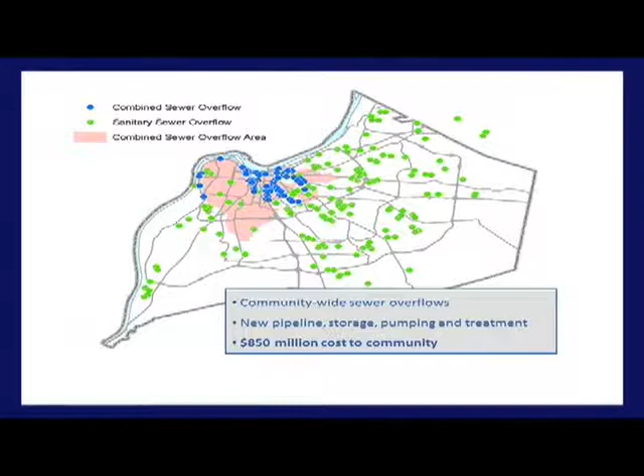You see two different colored dots on that map. The blue dots toward the northern part of the city are combined sewer overflows - they go straight to either the Ohio River or Beargrass Creek, and they're the older, original sewers built in this community that carry both stormwater and wastewater together. The other dots outside of that are separate sanitary sewers with separate stormwater systems - those are sanitary sewer overflows that behave the same way, just in a different part of the system.

When we look at the work done in this community to solve this problem of overflows and the public health impacts, it goes back to the 80s, when MSD, working with the state, removed hundreds of failing treatment plants that had been built by subdivisions as the community sprawled away from the city. Once those were removed and thousands of septic tanks eliminated, we still had these overflows remaining.

In working with EPA and the state of Kentucky, it was discussed that we needed to move this work forward, and we entered an agreement with them to clean up this remaining part of the pollution.

That plan was submitted in 2008 per that agreement. It was approved in 2009, setting out stipulations for when this work would be completed. The work on those combined sewers, the older sewers mainly within the Watterson Expressway, must be completed by the end of 2020, and the work on the separate sanitary sewer system must be completed by the end of 2024. The particular project we're discussing falls within the 2020 group.

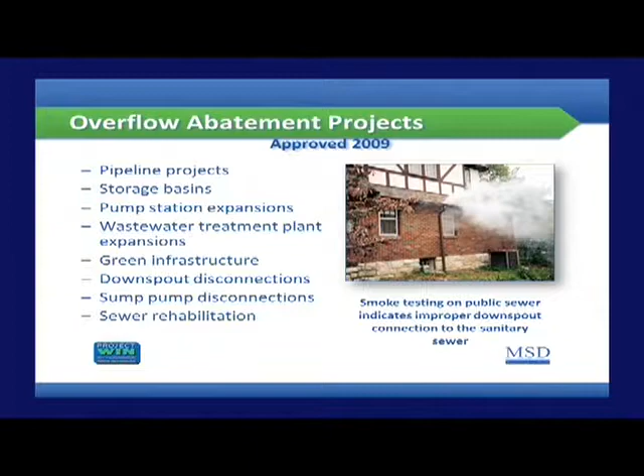You can see the specific groupings of projects that have been going on since we entered into that agreement. So we're actually in the section where we're designing those CSO basins, those overflow basins for those combined sewers that have to be finished and operational by the end of 2020.

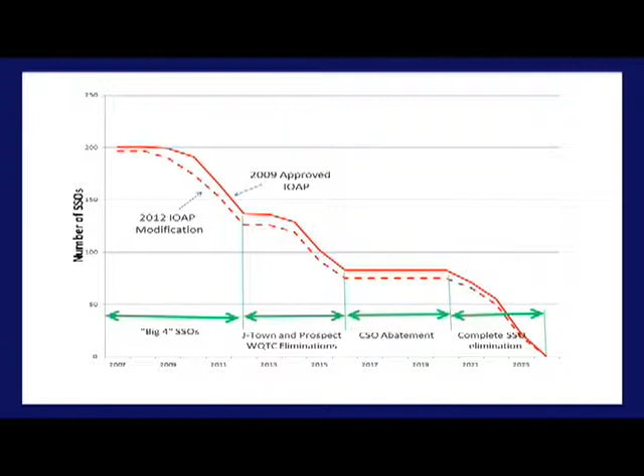So what we're going to be doing this evening is actually presenting some early design concepts and getting your input on how we can enhance those, what options might be more amenable to those that use this area that we're going to be talking about.

It's a little bit different than we've done in the past, and so the little clickers that you have will be working with you to provide some input through those. At that point, I'm going to hand this over to Dr. Ted Grossart with the University of Kentucky, and he's going to be asking you some questions.

See, you could have left the UK part out, and I probably would have got along better.

Hi, my name's Ted Grossart. I am at the University of Kentucky, but in my defense, I'm also teaching a class at the University of Louisville, so I'm partly, partly reprieved.

The MSD has asked us to come in and help them improve and give them a better way to get a more nuanced set of information from the people in the districts that are going to be involved with these projects. So the kind of work we're going to do involves sort of like having a giant focus group.

We're going to ask questions of you. We'll record some of your answers, and then you'll use the keypads to give us some responses on some of the answers that you've given us. We'll start with some relatively simple things.

I'm going to ask you, let's go to the next slide. So, first question is, how young are you? And of course, you have ample opportunity to fib here, but then I wouldn't know who is fibbing, so press the number that corresponds to what you would like your age to be, or you believe your age to be.

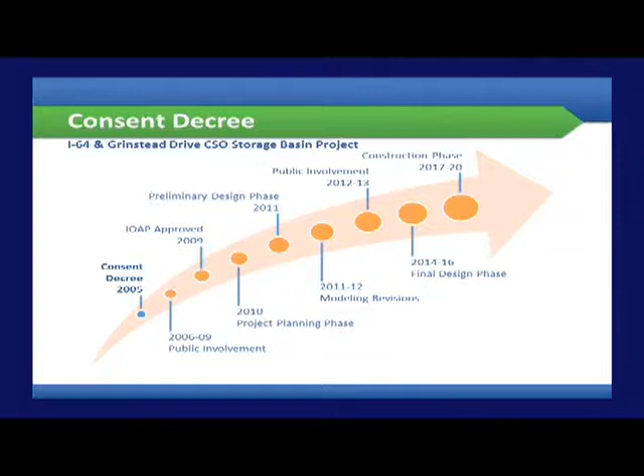Beginning back in 2005 with our original consent decree, we started a public involvement process in 2006 and carried that through 2009, with a series of about 20 overall consent decree related meetings throughout the community, in addition to about 200 or more meetings with individual neighborhood associations and smaller groups, to educate them about what was coming in terms of the work we had to do in the future, the magnitude of that work, and what that was going to do to rates in the future.

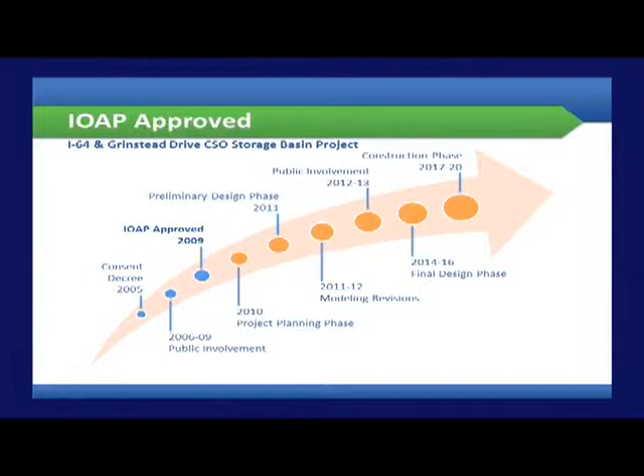That public involvement went through and continues today. The IOAP was actually approved in 2009 by EPA, so that was our blessing to proceed with work on this series of projects, although we had actually begun on some of them prior to that date.

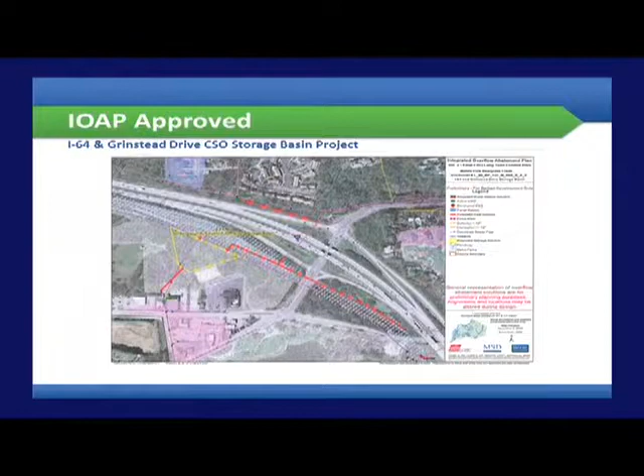This is a map that represents what the original plan for the IOAP basin looked like for the I-64 and Grinstead project at the time. It was about a 2.75 million gallon basin originally sited in an open area just northwest of Jim Porter's property, between Jim Porter's and the Middle Fork of Beargrass Creek. So that's where we started in terms of a conceptual plan for this particular project.

If you've been to any of these meetings before, you'll understand that these CSO basins are sited among numerous CSOs. They're sited strategically so we can convey and store flows from multiple CSOs instead of building a basin for each one. So we're collecting flows from 4 CSOs at this location.

So we began the design phase at that time, and we had a roadmap of what we thought that was going to look like. Early in the process, because that site was originally selected at a pretty high level, we did a more in-depth review of some of the adjacent properties near that site, still concentric to the 4 CSOs we're trying to control.

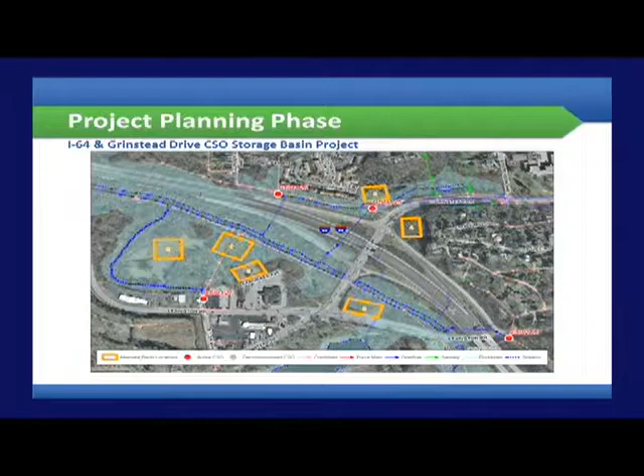So we moved into what we thought was going to be a preliminary design phase, and about the same time we went through a modeling revision in our consent decree. One of the good things about our consent decree is that it gives us the flexibility to modify our plan as we proceed, making modifications as we find ways to make it more efficient, either from an overflow control standpoint or a cost standpoint.

What that modeling revision did to this particular basin was take it from 2.75 million gallons to over 15 million gallons, which was a huge swing. This was one of the basins most impacted by those modeling revisions. We're happy to share the details of why that happens in some places and not others, but this probably isn't the place for it.

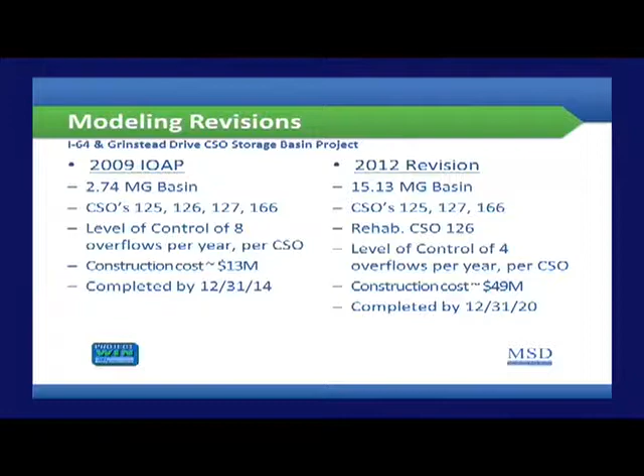But two things happened in 2012. One substantial thing is that we requested the completion date of this project be pushed out to December 2020, as opposed to the original date of 2014. So we essentially bought ourselves some time because of the size of it. We entered into a public involvement process that brought us out to a meeting at the Girl Scouts back in 2012.

The feedback we got from that meeting was twofold. One, we got lots of questions about why we were putting it here. We also got lots of input about whether we'd considered other sites, green infrastructure, or other methods that could downsize this basin at this location.

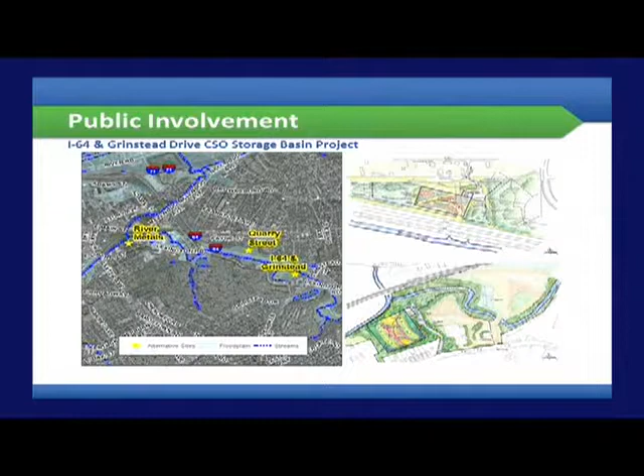So just to give you a sense, we did actually look at two other sites during that process as well. This is the original site behind Jim Porter's. We looked at two other sites, one being down at the River Metals property further west on Lexington Road, and also a site across Interstate 64 which we call the Quarry Street property. It was also down in the floodplain, but it was an available site close enough for us to consider.

From a cost standpoint, neither of those sites turned out to be near as effective as the proposed basin behind Jim Porter's. It also involved a lot more environmental impacts in terms of constructing conveyance lines along Beargrass Creek.

So we came out again to Jim Porter's, the Girl Scouts, in 2012, and presented some concepts about what we thought this site could look like. This is another rendering that you'll see later in the presentation as we get more feedback about what this site might look like. On the heels of this meeting, we went back and started looking at ways we could alter what this basin might look like in terms of size.

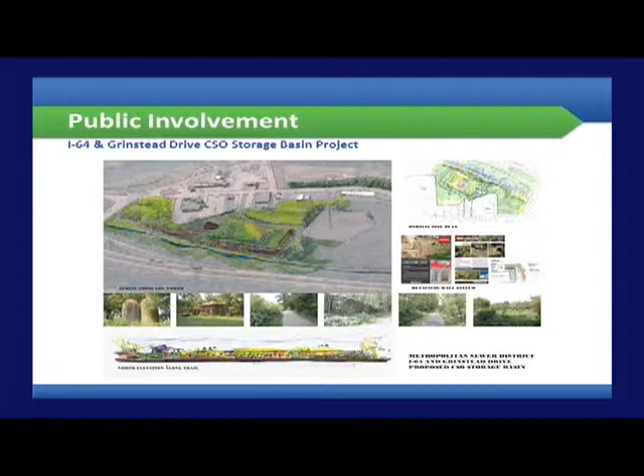When we start talking about green infrastructure, it's helpful to spend a minute talking about what green infrastructure means to us, because it means different things to different people. Green infrastructure to MSD is a means for us to either infiltrate stormwater into the ground or otherwise absorb stormwater. Because stormwater and sanitary sewage is our mission that we're tied to with these projects, we recognize that green infrastructure has a lot of other places in the community.

It's important to understand that green infrastructure works very differently in different parts of Jefferson County and the city of Louisville. The western part of the city, west of First Street, we are into deep sands and alluvial gravels that drain very well, and they're great candidates for us to infiltrate stormwater into the ground instead of constructing large storage basins. So instead of building storage, we take advantage of the storage that is in those soils.

We have done that effectively through several demonstration projects, and we have actually eliminated one of these small CSO basins in the CSO 130, the Butchertown area. If you drive through that area, you'll notice a series of improvements involving tree wells, some pervious pavers, and other items that have essentially allowed us to eliminate a very small CSO basin. We're able to do that there because of the type of soil that can drain that stormwater. We've got a similar approach with a larger basin a little further west in Portland, again because those soils are conducive to that type of work.

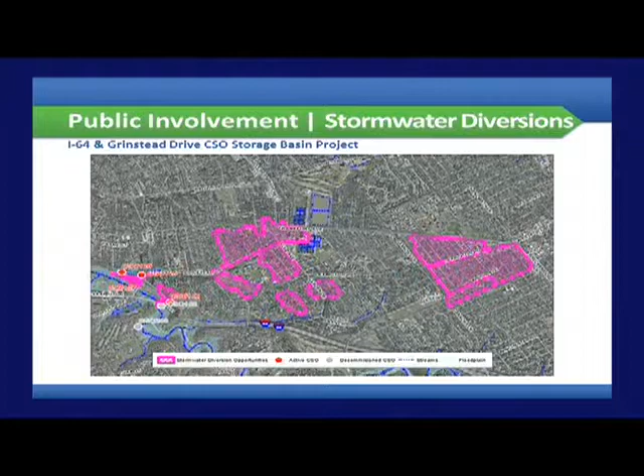So they're separated within those areas, but they dump into a combined sewer. These are some of the areas where we have planned to peel off that stormwater from the combined sewer system and divert it into the natural drainage system of the county. By doing so, that has allowed us to take advantage of that reduction and has resulted in a decrease in the size of this basin as well.

There's another tool I haven't talked about: MSD, about two years ago now, introduced a program where we incentivize developers to install green infrastructure. Essentially MSD fronts some of the construction dollars that allows them to install green infrastructure, and in doing so they also get a discount on their drainage. There are two large areas in this watershed taking advantage of that and also contributing to this reduction: the Baptist Seminary and Sacred Heart campuses. So those are two other tools that are really helping us here.

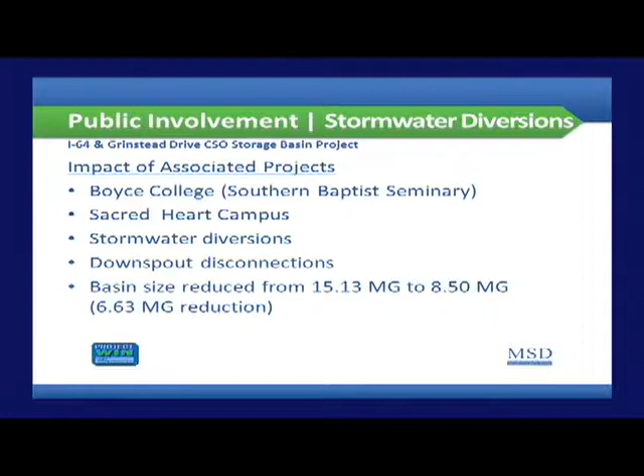So again, that's a summary of all of the projects, some public, some private, that have helped us reduce this basin from over 15 million gallons down to 8.5 million gallons, which is where we are today.

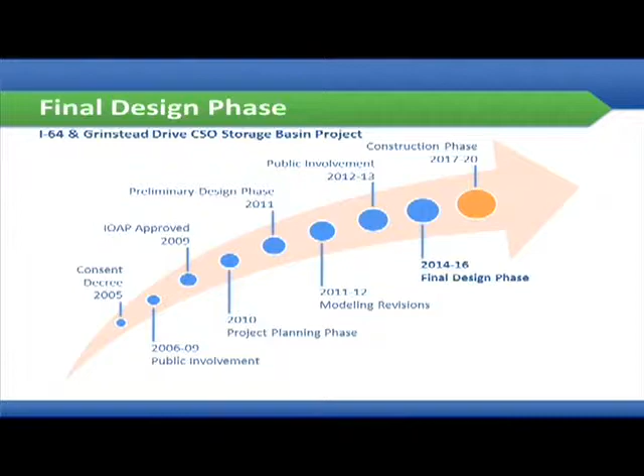So here we are entering what we call our final design phase, and it's important to recognize that we did successfully have the completion date of this project moved out to December of 2020. That bought us the time we needed to go through this review, to take a hard look at the other alternatives to the size and location of that basin. We have reduced the size of the basin. We have not eliminated the need for the basin. So we have to have this done by 2020, which seems like a long way away, but we have probably two years of design work to do and almost three years of construction work on the tail end of that. So we're at a decision point with this project.

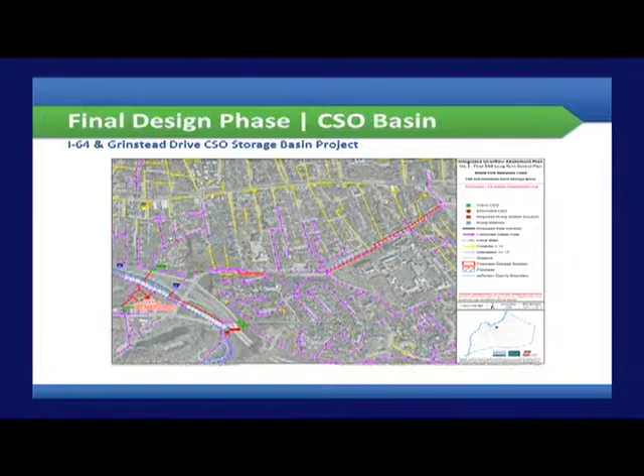This is a very large scale, difficult for you to follow, but this is the basin site, the 8.5 million gallon basin site. There's a series of stormwater diversions that will be built down along Lexington Road that will help us pick up and divert some of that stormwater from the system. So that's what that looks like today.

So what we're going to get into tonight is we have landed pretty firmly back to where we started really in terms of the location of this basin. We've gone through a very extensive alternatives analysis in terms of location and size.

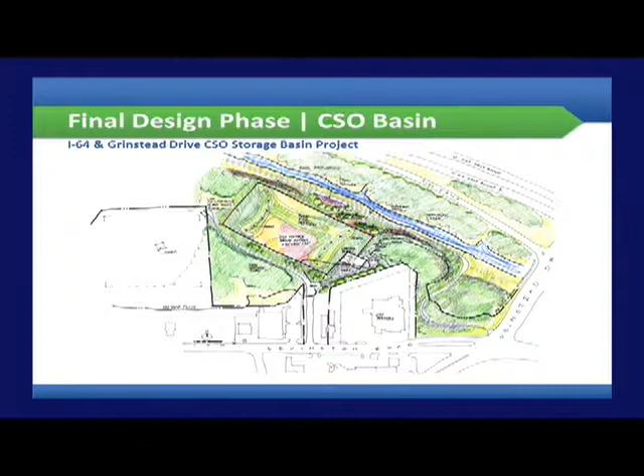We are confident that there absolutely has to be a basin here, and we are moving forward with the design of an 8.5 million gallon CSO basin in this area behind Jim Porter's and between that and Beargrass Creek. So that's one of the announcements we want to be very clear about tonight, is that is where we are proceeding with the location of that basin.

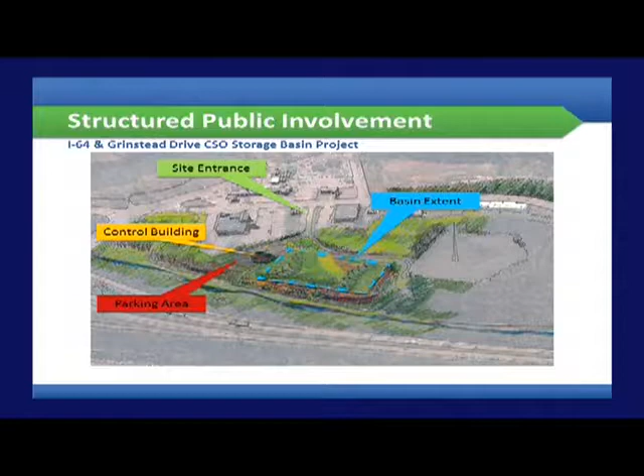So one of the things we want to start getting feedback on now, having arrived at that decision and having to make some decisions moving forward about design, is what would that look like? What can that look like when we're done with it? It's very important for us to get involvement from the public about what the aesthetics would look like, what the property itself would look like, and is there any interest or reason to include public access to the property? So those are some of the issues that Ted is going to help walk us through.

So there's really 4 key issues we want to try to get some input on first, and that is, what about access to the site? Typically, when MSD builds a facility, a treatment plant, a regional pumping station, they're fenced off with 6-foot chain link fences, and they're shut off from the public with no public access. We recognize there's an opportunity here maybe to do something different, and we'd like to get some input from the audience about what those options might look like.

So 4 options on the table: the first one I just described, no public access to the site at all. MSD would retain rights to it, we would build it, we would fence it off, and we would maintain it, and the public stays out of it. So that's the first option we would like to get feedback on.

The second is a somewhat restricted access, in that we would allow public parking adjacent to our control building, and we would allow that parking at that site and construct access to the series of trails that people use along Beargrass Creek. The third option is really an unrestricted option in terms of the public being able to access the entire site. You would be able to park there, you would be able to access the trail from there.

You would be able to have some type of passive recreation in an area on top of this CSO basin. Not knowing what that looks like, we're really talking about some type of passive recreation, something in a grass environment with some vegetation. It could have trails, and other than that there's not a lot of detail we can put into it, but we'd like to get feedback about what the public thinks about that.

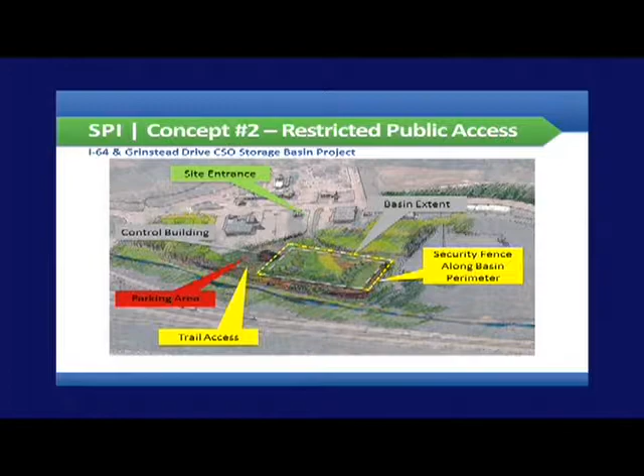Yeah, so for the next concept, you'll see that the fence has been modified to go only around the basin itself, the concrete structure itself, which is buried. We have the same entrance off Lexington Road. We have a proposed parking area that will be used for both MSD operations as well as available to the public, and we'll be constructing trail access, used as a trailhead connector to the existing trail along Beargrass Creek. That trailhead and connection could look a lot of different ways, but conceptually we're trying to get some feedback on what that concept is like to you all.

Okay, thanks. So it's the same drill. Yes, ma'am. Well, currently...

Jim Porter's is nice enough not to, though they probably don't have a choice, but a lot of people with their kids will park there because they want to just ride the trail and not ride all the way from Big Rock or something. So this would relieve Jim Porter's from having to provide it.

There was some proposed parking down at the Metro Park, the Greenway, which is right next to the Girl Scouts, but there's a master plan for that that has not been funded. So right now there is no parking to get on the trail, not there nor at the exit at Locust Street - there's no parking down there because it's residential. So this would be a positive - additional parking would be a positive.

Okay, anyone else? Yes, sir? There is presently no access to the DOT property on the other side of I-64, the so-called Irish Hill area, which is also suitable for public park use and is used by the homes. Would MSD consider creating either a pedestrian bridge over I-64 or a tunnel access under 64, along with this major construction of the under-64 interceptors, to join up and enhance the trail experience?

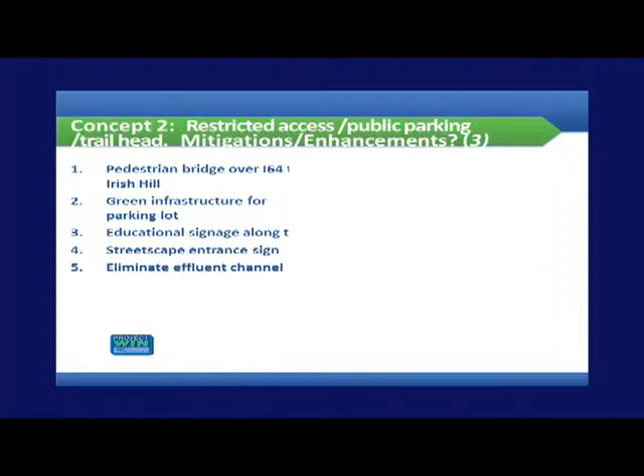So, green infrastructure for the parking lot, and the smell from the effluent channel. Overall, as a concept, is it lousy? Is it great? Is it somewhere in between? Is that with our mitigations and enhancements, or without? No, it's without. So a fourth of you really don't like it, and a fourth of you kind of like it.

All right, so let's go to the next one, which is a passive recreation option. Would you prefer that we just go to the mitigation enhancement question? Would that speed this up for everybody?

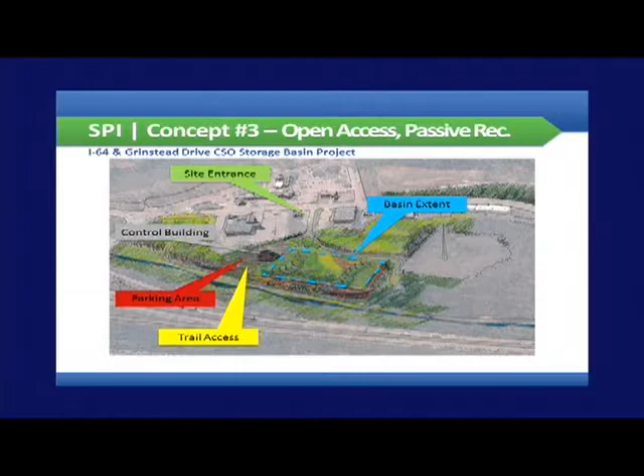Okay, so what we're talking about here, just real quickly, is that this is highlighted just to show the footprint of what the top of that basin could look like. Not necessarily that size, but the same parking would be available, same trail access, and this would be dedicated to some type of open green space with some type of passive recreation ability. So the question here is basically, if you imagine other trails and green space you've enjoyed, what was it that made it enjoyable that we could do here?

What's the potential here of things that could be done? I think there is an education opportunity here, in terms of the MSD system and the facility, and its impact on the environment.

I would suggest that, if nothing else, a community garden or box garden. Either set up and organize a community garden, or make it available for someone else to manage.

Other ideas? Like sports, for example a soccer field, tennis court. Right, that's going to be our next option, is to have some kind of sports idea. So hang on to that.

It's sports, but it's also an asset. On our school board, one of the local women raised children and we were advocating for some empty properties in our neighborhood that maybe have lockers, like safety deposit boxes, so you can put your change of clothes, or it would be like park and bike, a place to put your valuables. So lockable lockers. Evidently some other best management practice elsewhere is doing this - something other communities have done.

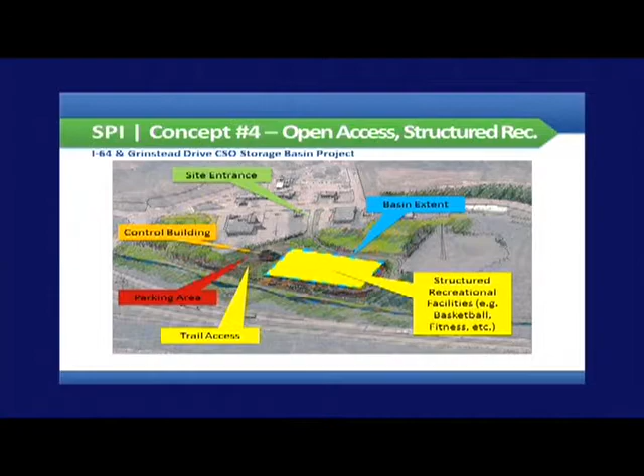Steve - so the last one, same scenario: open to the public, same parking area, same connection to the trailhead. This time we have some type of more structured use for that area above the basins, in terms of - use your imagination - tennis courts, volleyball courts, basketball courts, things of that nature.

Okay, so again we'll go to the enhancement question, the mitigation - describe this for me in more detail, what would you like to see on it? Go ahead and throw in maybe some kind of kayak put-in or something like that - a place to put in kayaks, put in canoes. What else?

Picnic facilities, okay. What else? Again, a privatized, like a Mockingbird Valley type thing. It's a privatized facility for soccer and tennis. So, a privatized soccer and tennis facility, okay.

What else? A playground? Okay.

I think a playground is great, so is the basketball or fitness area, but that's just people running back and forth. Some type of guided, educational trail, so it's learning as structured recreation, as opposed to a more formal trail with educational panels and that sort of thing. Okay.

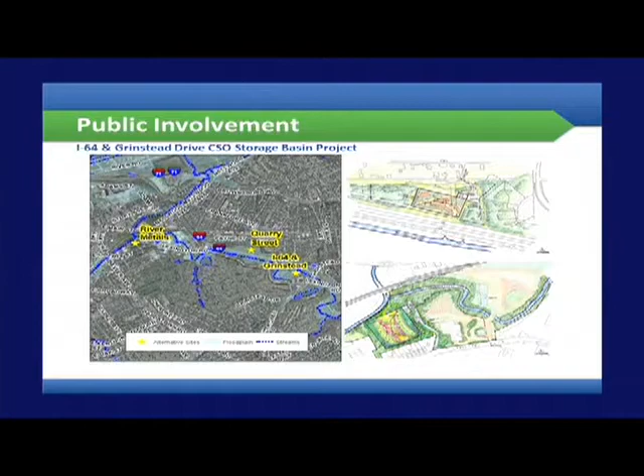Here's a suggestion. You see where it says Quarry Street? I noticed that you've got CSO 126 as part of your program. CSO 126, 125, and 144 are on the north side of I-64. And as you know, in the Hood neighborhood, we've got the slopes, the hills. And because of I-64, we've got an elongated bowl going on. So instead of having 126 come onto this side of the expressway, what if you guys would run lines through CSO 144, 125, and 126, which is a 442-acre watershed, and have an elongated basin, and then on top of the elongated basin, you have a walking bicycle path.

What you could do is have the entrance at Grinstead, coming parallel along the north side of I-64 where the cliffs are, and then exit on Stoll, which is a public right-of-way, a public street. Stoll would take you up to Payne Street, where the Louisville paving's at. So then we could have a walking bike path on both sides of 64, and it could connect to the Butchertown walking bike path. But more importantly, since CSO 144 and 125 weren't addressed with this basin, what if you had a basin on our side, the Clifton side of I-64? It would be an elongated bowl, basin, but the more important thing that would be way cool is if you could have a walking path, bicycle path.